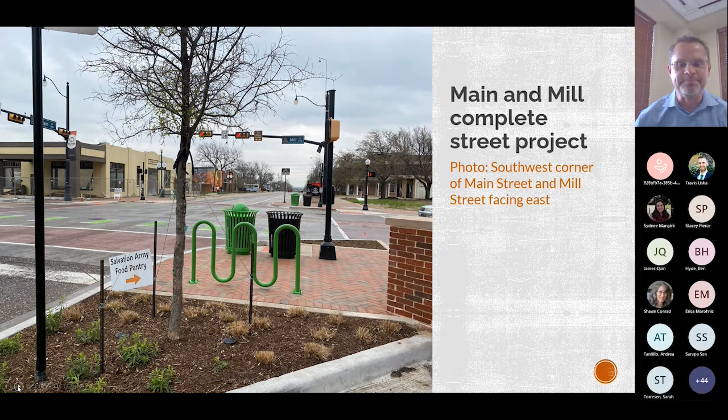This is along Mill Street. Now, Mill Street was formerly US Highway 377 before I-35E was built, and it was a 4-lane undivided arterial street. Because it was so wide, it carried traffic at very high speeds, which made it dangerous for pedestrians.

So with this project, we put the street on a road diet, and now it's a 2-lane street with a continuous left turn lane. The outer lanes were converted into bike lanes, and a combination of parallel parking and reverse angle parking, along with the street trees, which will be a huge benefit as they mature and provide shade on the sidewalks. It'll make it bearable to walk around in the summertime.

This is another view looking north on Mill Street. This is a section that has the reverse angle parking.

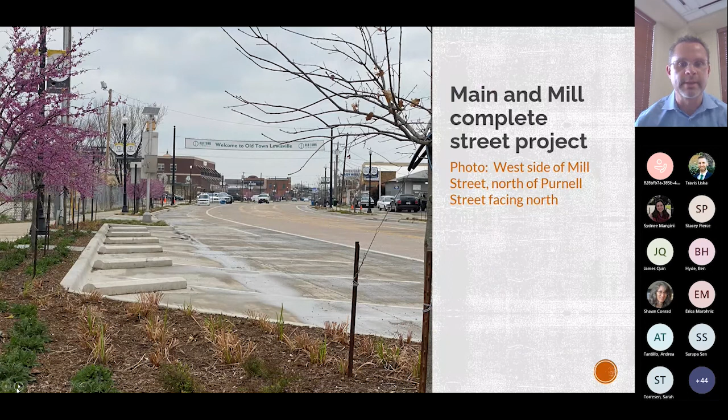This is at the intersection of Purnell and Mill Street, kind of our southern entry into our Old Town area. This is one of the bioswales that was installed as part of the landscaping with the project. So multiple purposes were kind of built into the project, along with multiple benefits.

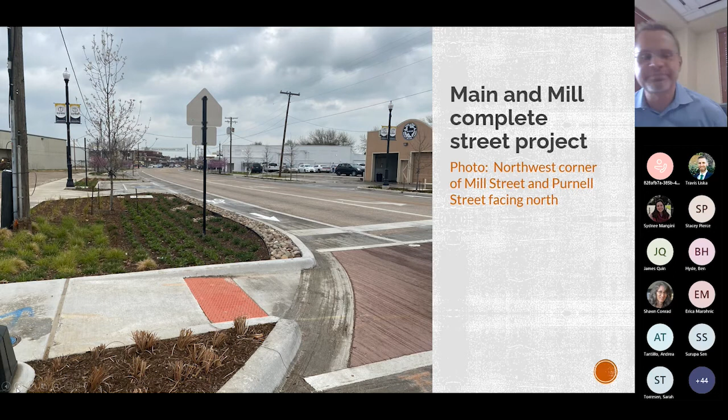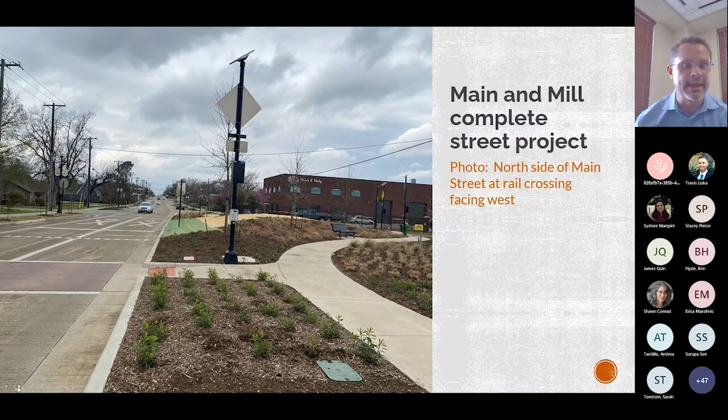Another shot of the eastern end of Main Street, right near the Old Town Station. This was a kind of a triangular island. This is where our couplet begins, and where traffic is diverted onto 2 one-way streets. This was just a huge, flat, concrete median, and that whole thing was ripped out, and landscaping was put in, and pedestrian amenities. Again, it just really changed the whole character of the entire area.

Then this is on Main Street, closer into our historic core. This is one of the art benches that our Arts Council funded in conjunction with the Complete Street project.

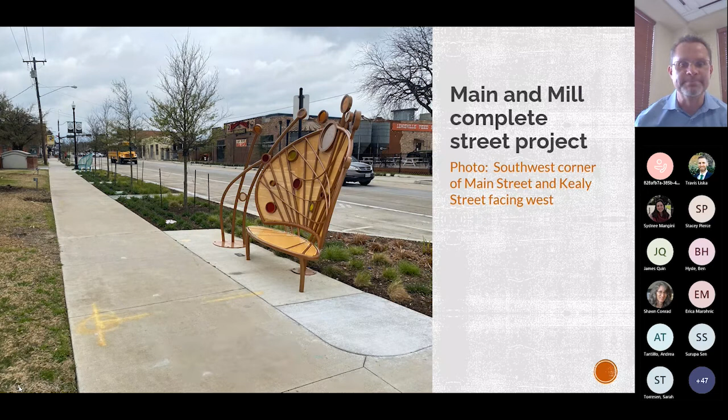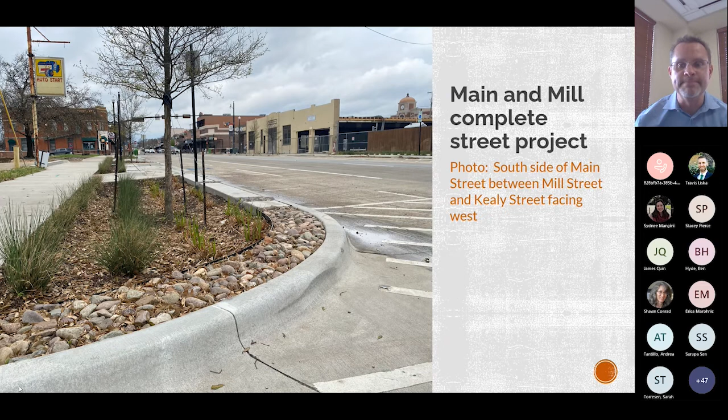This is about mid-block on Main Street between Mill and Kealy. Again, it shows one of the bioswales that was incorporated into the design along with the street trees. And I believe that concludes the Main and Mill project.

Our staff is currently working with the consultant on the design of another complete street, East College Street, which is kind of the northern boundary of our Old Town district. It'll be pretty much the same elements: putting a street on a diet, narrowing the lanes, adding in parallel parking and bike lanes, and wide sidewalks with trees, lighting, and street furniture.

This is just kind of the schematic. The current status of this project, we're about at 65% on the design. Construction should start next year.

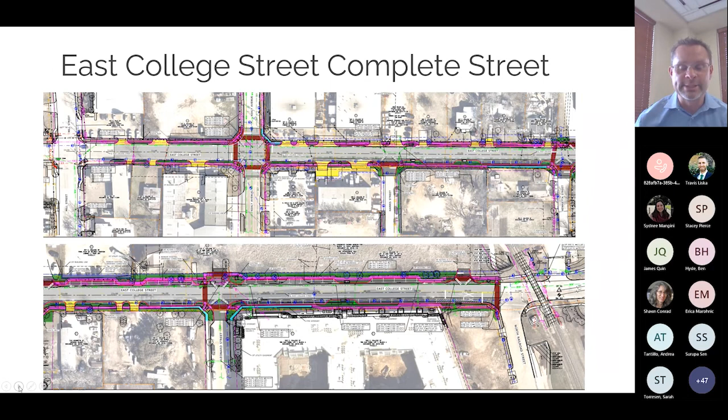It's amazing how infrastructure improvements like this have completely transformed our Old Town area, making it even more walkable. Just having Main Street done has given us a brand new route from our historic core to the station. Before that project was built, we had old broken sidewalk sections, some areas with no sidewalks at all, and very little shade. It was not a pleasant walk from the station to Old Town, but now it is, and it's getting a lot of use.

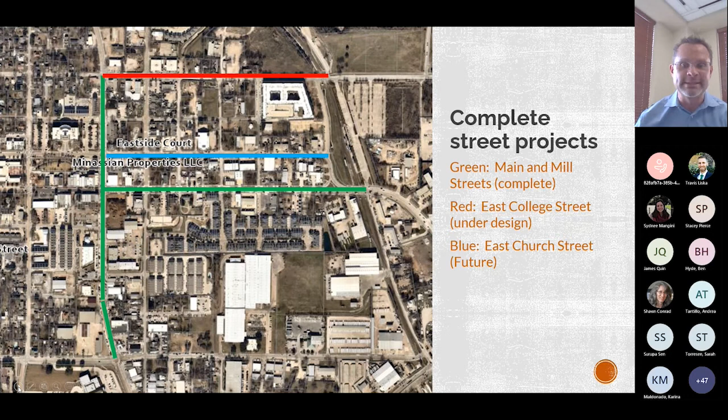Now I'm going to cover some of the exciting developments that have been occurring over the past couple of years. The very first of our large-scale projects is Old Town, just west of the platform of our Old Town station. It's a 4-story, 286-unit urban residential project, and it's what everyone calls a wrap, where the units are wrapped around a garage. It also has two interior courtyards, one with a pool and the other with outdoor amenities. Construction began in November of '19 and was completed in summer of '21, and it's currently 96% leased.

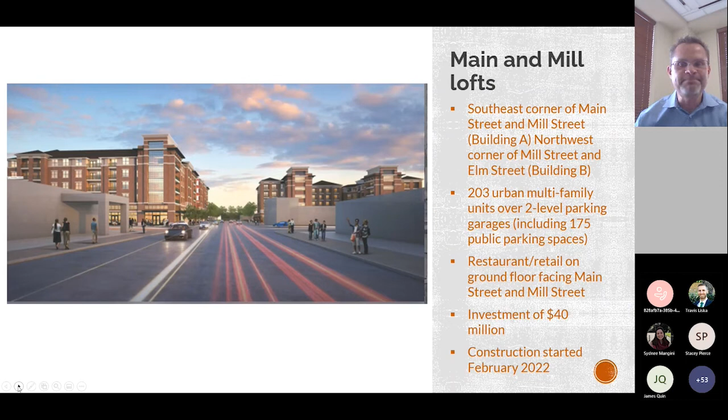Number three, we have the Mill Old Town project, at our southern gateway down at the northwest corner of Purnell. Purnell is the southern boundary of our Old Town Design District, and Mill Street is our primary gateway from the south. This site was previously a former REW Materials business, a drywall wholesale distributor - kind of like a lumberyard. I think historically it had been a lumberyard, and that's where the mill name was incorporated into the name of the redevelopment.

One of the really scary things about the former business was a very high volume of 18-wheelers coming in and out of the site early in the morning, and there's an elementary school about a block away. So there were small children walking to school dodging these 18-wheelers, and we knew we had to address that immediately. We worked very hard to relocate REW to another location in the city, and they moved about 2 years ago.

J Street will be building a 4-story building with 213 urban multifamily units. Most of the amenities will be here on this corner. They wanted to honor the site, which was a former lumber mill, and incorporated some design elements to reflect that history. There will be a pocket park at the end with entertainment activities programmed as part of the development. It's about a $30 million project, and construction will be starting next month.

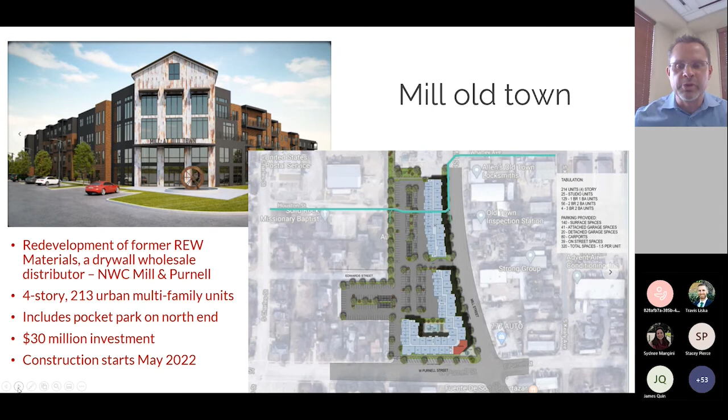This is our fourth residential project, called Old Town Station. It's just northwest of the Old Town Rail Station and immediately north of the ARA project. This will be the largest of the 4 projects, and it'll be on the north side of East College, built in at the same time as the complete street, which we're very excited about. It'll consist of 3 buildings, 4 and 5 stories tall, with 420 urban multifamily units, about a $77 million investment.

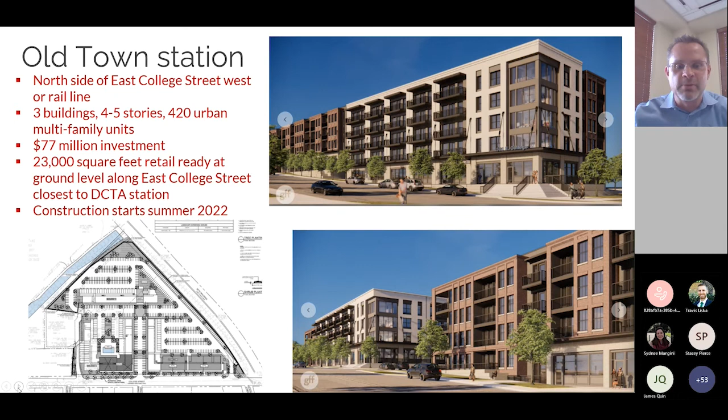One unique feature, shown in the upper photograph, is the ground floor will have 23,000 square feet of retail-ready flex space, built to commercial standards. It'll initially be leased out as living units, but as the market matures and demand for retail and commercial comes into being, they'll start converting that ground floor area, which is in view of the platform of the Old Town Station. Construction on this project starts in just a couple more months, so we're really excited about that.

With those 4 previous projects all together, we got about 1,100 residential units, and that's not even including about 100 townhome units that have been under construction over the last couple of years. So you're looking at about 1,200 new units. That's really going to be a game changer, getting those heads on beds, adding to the walkable atmosphere that we've been concentrating on in Old Town Lewisville.

This project, Deck on Main, is one of our larger commercial projects moving forward. It just started construction. It'll be a 3-story building. The first floor will have restaurant space, the second floor will have office uses, and the third floor will be an event space with a covered deck at the rear, overlooking Wayne Ferguson Plaza, our urban park, which is really the centerpiece of our Old Town. This is about an $8 million project.

This was the site of an old bank building, which was a much smaller building. It had been remodeled back in, I believe, the 70s. It wasn't very flattering architecture and didn't really match the architecture of the rest of our historic Main Street. This will really fill in that block and complete the void that was there.

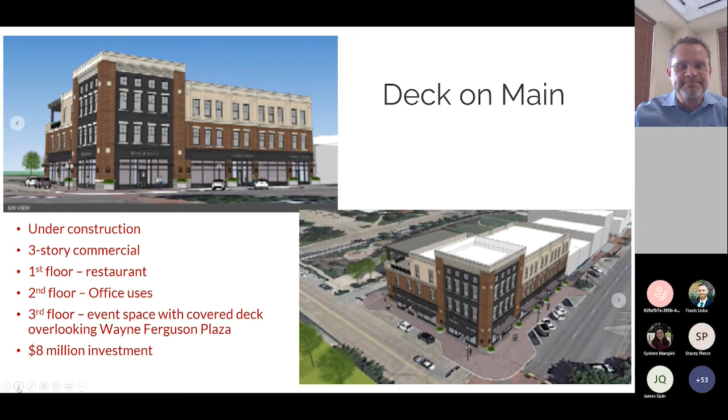This is my last slide. We've been working on an update to our Old Town TOD master plan. This will be our 3rd update. The original master plan was adopted in 2010 and updated in 2017. The previous plans focused mostly on the core of Old Town and the 5 blocks that separate the station from the historic core. With this update, we've really expanded the overall area of study.

We added that whole eastern side, east of the rail. You can see the rail line going north and south through the middle. We also included more of the adjacent industrial areas to the southeast, on the east side of the tracks. We have some incredible opportunities for additional TOD development, and this plan will formulate a strategy on how we get there.

Another very important component is we've added an infrastructure study. We have an independent civil engineering firm looking at all of our water lines, sewer lines, streets, and drainage facilities across this entire area, which will help us pinpoint which areas we need to invest in first, to upgrade the infrastructure so it can facilitate more rapid redevelopment. We learned with the Main and Mill project and the Complete Street that when you build it, they will come. Having that infrastructure in place is usually a big draw for investors and developers.

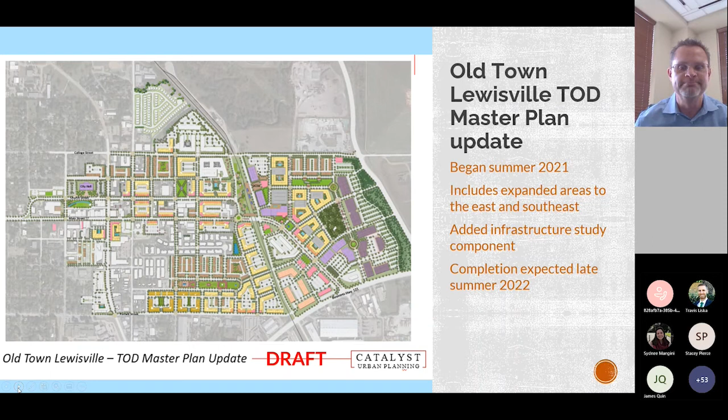That concludes my presentation, and I'll be glad to answer questions a little bit later on during our meeting.

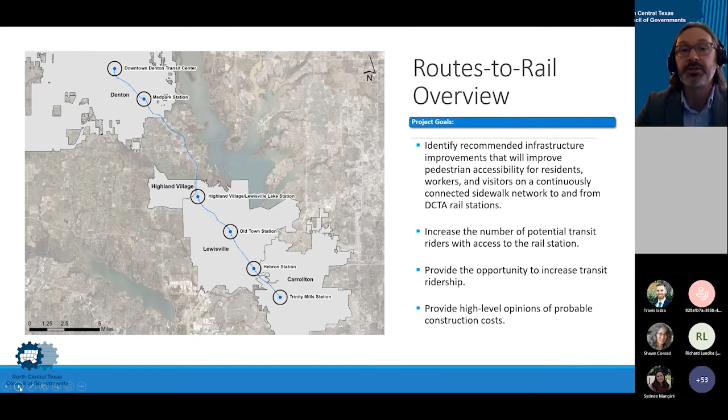As well as part of this project, we developed high-level opinions of probable construction costs. That way, these agencies will have the preliminary information they need if and when they seek additional funding.

So what infrastructure did we actually look at within the half-mile radius surrounding each rail station? The answer is that we looked at both the existing and the non-existing sidewalk network, including the sidewalks themselves, but also crosswalks, driveways, trails, and unmarked crosswalks. This sidewalk network of both existing and missing segments served as the base for our analysis. After identifying the missing sidewalks around the rail stations, we then went through a prioritization process, which I'll provide further information on.

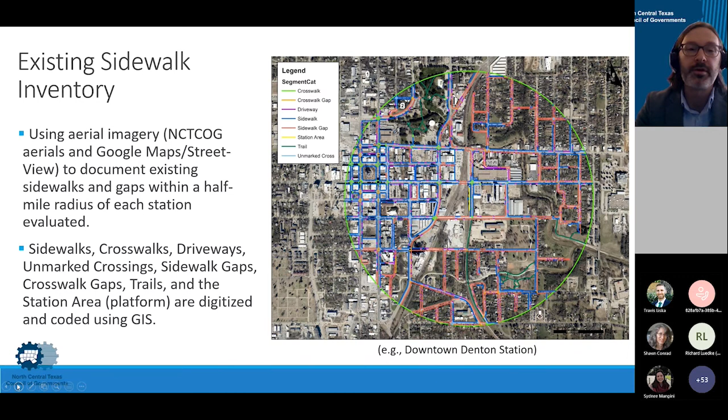So land use, I know this is part of the land use committee task force. Land use played a significant factor in our evaluation, specifically parcel data, primarily from Denton County, but also Dallas County appraisal districts. The methodology for this analysis was originally developed from a Federal Transit Administration TOD planning study that Travis was very involved in for the DART red and blue lines that was completed in 2020. From that study, density was estimated at the parcel level, and it represents the maximum number of people who may be at a property at any given time, based on both the land use category and the reported size.

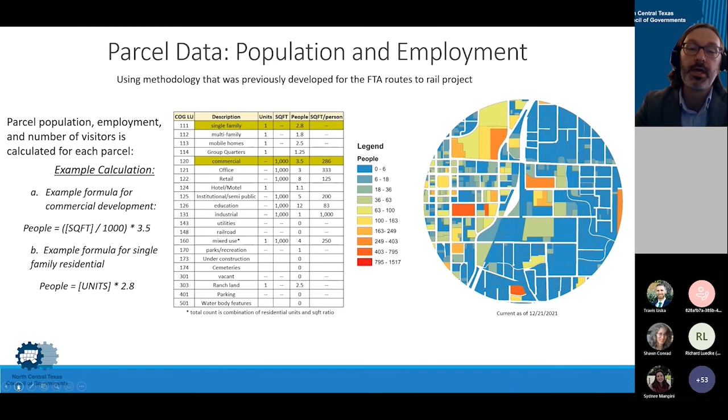For example, for every 1,000 square feet of reported area for a commercial property, we estimated 3.5 people. The map here on the right is a heat map identifying parcels around the downtown Denton Transit Center that are estimated to have the largest densities.

When evaluating the missing sidewalk gaps around stations, the largest factor was the density estimate, which represents the potential new transit riders that would be connected to the rail station. But we also awarded points to missing sidewalks that were closer to the station, so density and distance were the primary factors. We also considered 3 other categories. Points were awarded to missing sidewalks that connected to major destinations such as hospitals, schools, and entertainment venues, as well as sidewalks that would address areas with a history of pedestrian crashes and posted high speed limits.

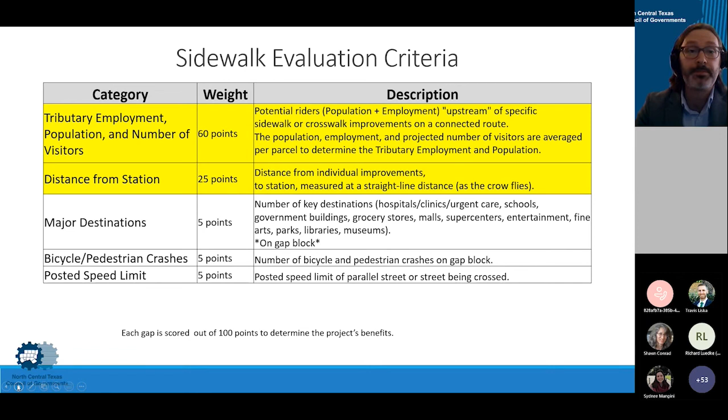After the whole scoring process, we prioritized sidewalk gaps on a high, medium, and low scale. With this map here, you can see the high priority sidewalks in red, the medium in orange, and the low in yellow, overlaid with the density parcel data that I previously discussed. Here also with the map, the existing sidewalks are in blue.

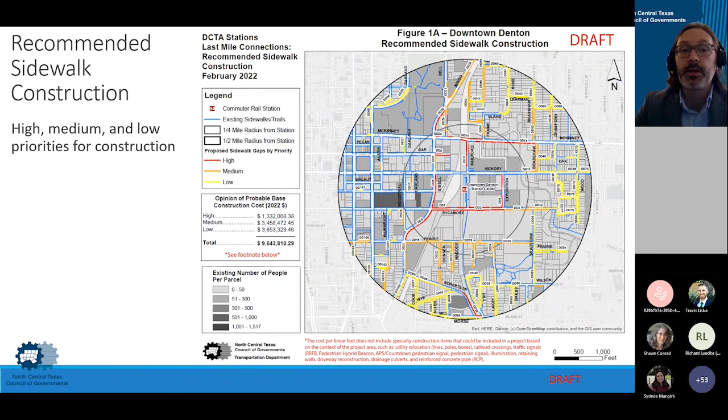For a quick visualization, I have a few slides to demonstrate how prioritized sidewalks will increase connectivity, using the example of the downtown Denton Transit Center. On this map, existing sidewalks are shown in blue, with individual parcels identified in gray. As you can see, many parcels are not connected to the rail station due to gaps in the sidewalk network.

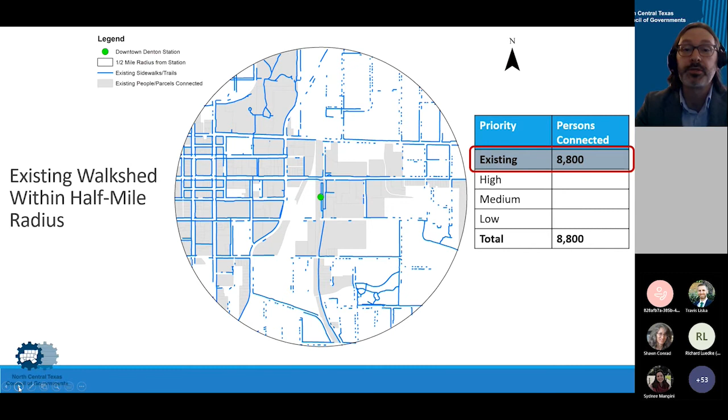Based on our analysis, an estimated 8,800 people are currently connected to the rail station itself.

However, if the high priority sidewalk gaps are constructed, an additional 1,100 people are estimated to become connected and able to access the rail station. On this map, the dark gray parcels indicate the new parcels that would be connected if those sidewalk gaps are constructed.

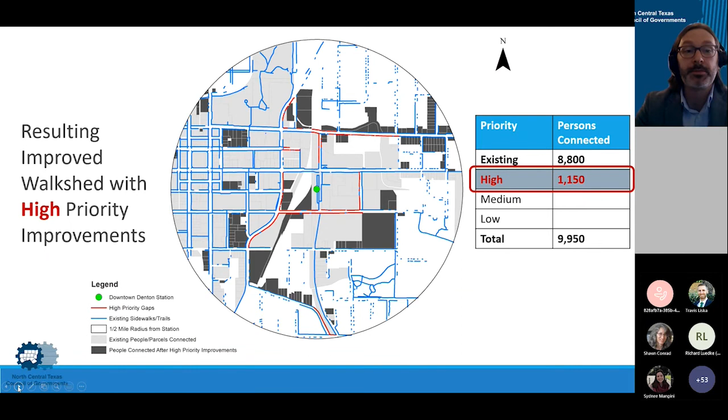Next, the medium priority sidewalks show an additional 2,300 people estimated to become connected. You can start to see the full half-mile radius area becoming more connected, with many parcels further away from the rail station able to access the station via the sidewalk network.

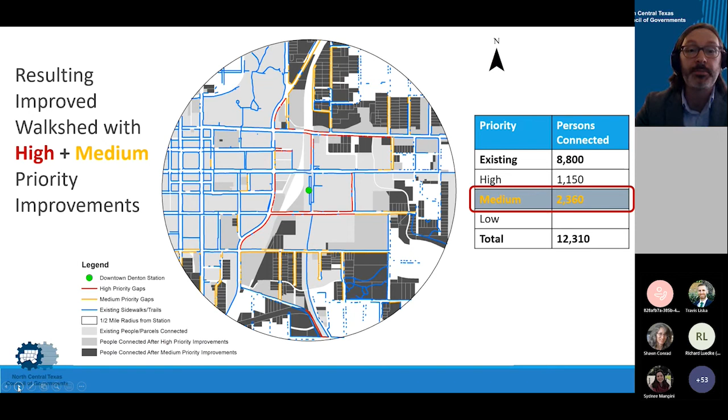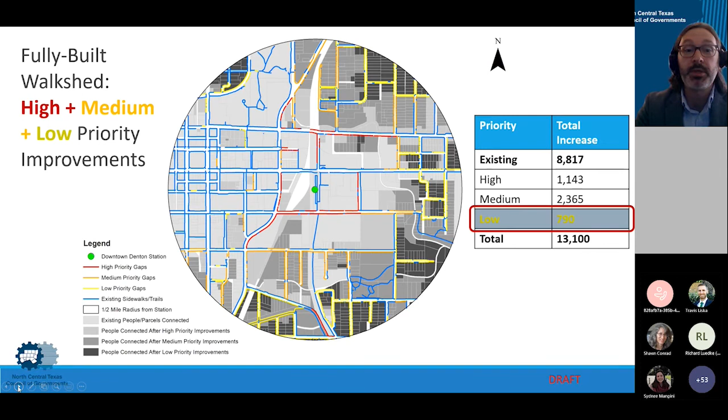I mentioned earlier that we developed a high-level opinion of probable construction costs for the missing sidewalk gaps for all six stations. The base cost doesn't account for factors that may or may not be encountered, such as utilities or lighting. Therefore, we encourage every agency to look at the sidewalk gaps in more detail to develop a more accurate cost estimate.

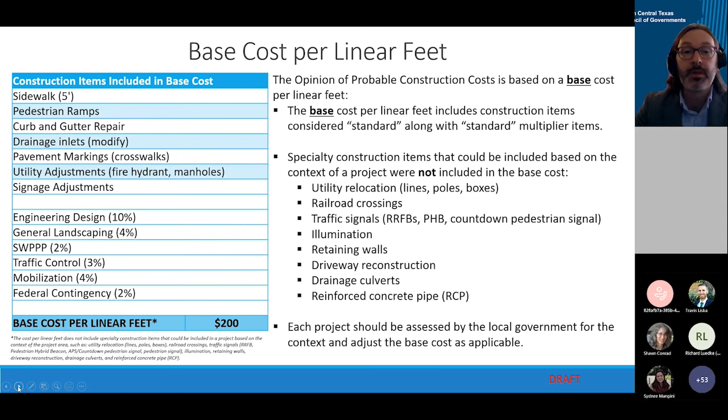And that is my presentation. If there are any questions later on, I'll be happy to answer them. Back to you, Travis.

Thanks, Daniel. A lot of good slides there illustrating the process. Really appreciate you going through those details. We've closed up our local updates section, and we just have a few questions in the chat to address here. Richard, if you're still there, we've got a couple for you. I'm going to try and help us get through these quickly.

First, I see Ben has asked about additional grants. I know NCTCOG will have an upcoming active transportation alternatives set aside, a funding call for bike ped projects, so that addresses that question.

Both Ben and Lashandra have asked about the retail coming into Old Town. Richard, what kind of retail do you have coming in, and is it on the ground floor of that multifamily, or is it restaurant, office? Can you tell us a little bit about that side of things?

Yeah, we're seeing a little bit of both. Our existing retail and commercial on the ground floor of our existing buildings are doing very well. It seems like excitement is building as more improvements are made and new projects come online, and more people want to jump on that train and be part of it. We're constantly meeting with new businesses that want to enter Old Town. I believe the Main and Mill project already got commitments for almost all the ground floor spaces, and they just started construction, so that's really good news.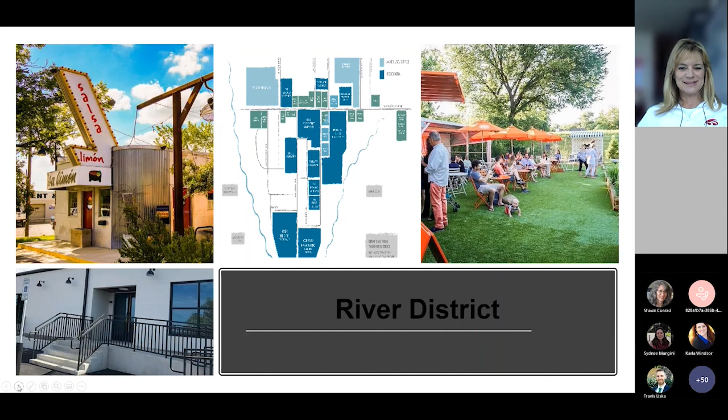This would be River Walk Homes, which are east of downtown, again in the neighborhood close to Topgolf. But these are townhomes. Our friends at Village Homes are really experimenting with a lot of product along the river. This area is just now starting, so a lot of different options are still in the sketch phase, not yet developed. But what you're seeing, I believe, is what they call the coastal design of this particular area. And it'll be exciting to see what that connects in a new area of our river network.

Waterside is located off of Bryant Irvin Road on the west side of town. Like many of the ones we've talked about, it features a direct connection right behind it to the Trinity Trails network, just down from Clear Fork and the trailhead, and features a great set of service options. So you're seeing here Whole Foods, restaurants, The Rim and Piatello, a lot of different residential product, all mostly for lease, although there are a couple of new for-purchase options, and then several other restaurants in addition to those, plus REI and great access across Chisholm Trail Parkway, again to Clear Fork and the trailhead.

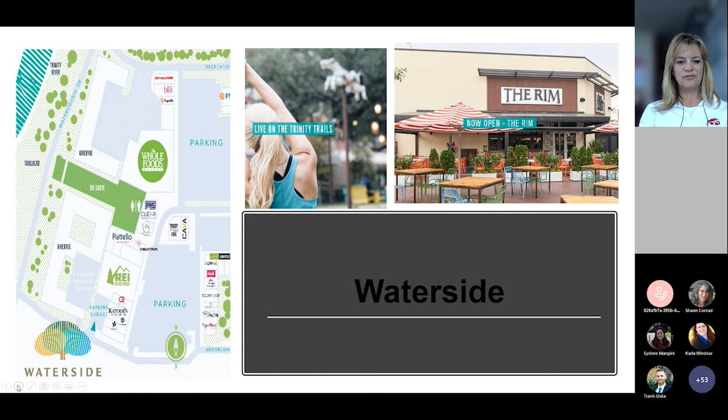And then finally, my last example is West Bend, which is across from University Park, and on the area of the trail that again is so mixed use. This though is much more commercial, so not a residential product here proper, but really close to our zoo and our Colonial golf tournament when it happens at the Colonial Country Club, and a lot of other residential and retail options, a lot of neighborhood access through West Bend.

Each of these areas is incredibly popular. They're in various stages of development, especially some of the residential ones, but we're so fortunate to have a diversity of product that is, I think, a benefit not only for our local residents, but our tourists, and an amenity that gives us a competitive advantage as we seek to improve our workforce and as we grow quite rapidly in Fort Worth. I might tell you there is a new exhibit at the Fort Worth Museum of Science and History.

It is the Biennale exhibit, which was on display in Venice back in November of 2021. It is all about watershed urbanism. So I work on the river and the trails, but it's a similar idea in that we want our environments to be symbiotic and complementary, and we want people to be able to utilize them in a variety of ways, both functionally for transportation, recreationally, and also to be able to use some form of transportation, bike or ped, maybe to even do some of the things that are errands and service-oriented trips.

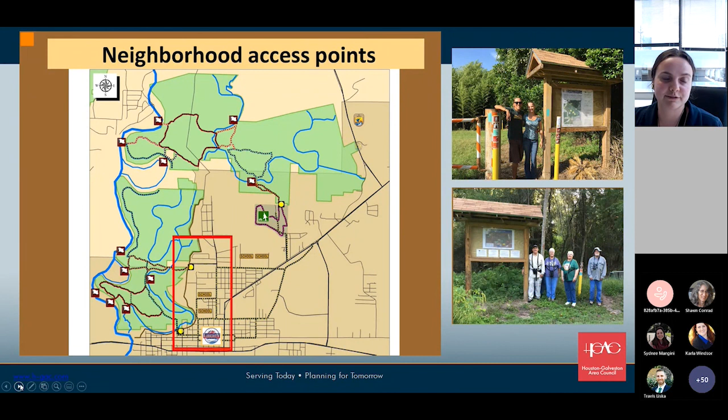This next scenario is in the City of Houston, in Harris County, and this was deemed the high investment example.

The Buffalo Bayou Partnership, a nonprofit, owns this 22-acre vacant site at the Lockwood Water Treatment Plant, and has owned it since 2012. They've been making a lot of progress on their multi-phase plan to build trails and amenities along Buffalo Bayou, which runs right through downtown Houston.

It's set to include a visitor center, event space, a cafe, and a dock where people can rent kayaks. Those are all high investment amenities, but the trails along Buffalo Bayou are also very well integrated into the city of Houston. At some of the already completed portions, there are food trucks along the trail, basic things like water fountains, and stairs and ramps that take you directly up into city streets. It's been a really successful project here in Houston.

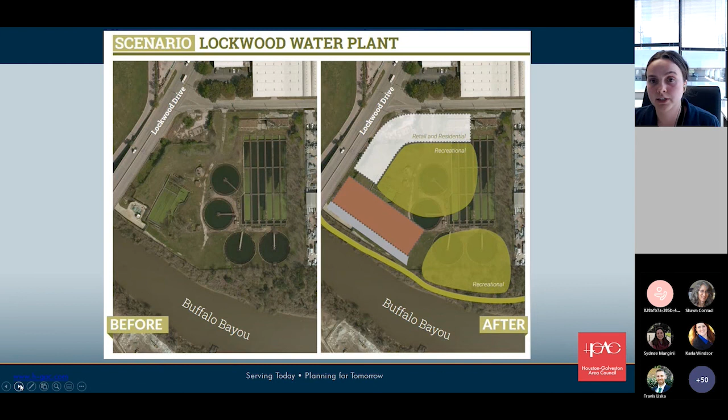So if you'll indulge me, I'm going to depart from the primer a little bit to spend my last few minutes talking about a project that is relatively new. The primer was published in 2018, and this is a project that is deploying a lot of the strategies from the primer.

A few months ago, five entities - the cities of Fulshear, Weston Lakes, Wallis, Eagle Lake, and Austin County - officially formed a local government corporation with the purpose to build a shared use trail along a former rail corridor, all west of Houston. If you're looking on the map, Houston is all the way to the east, and the trail moves westward.

One of the key elements of the vision that this group of cities and one county share is the idea of trail towns. A trail town is defined as a community that supports trail users with services, promotes the trail to its citizens, and embraces the trail as a resource to be protected and celebrated.

All of these cities have agreed that they plan not only to design, fund, and build a trail, but they want to work with city representatives, existing businesses, and developers to entice people off the trail and into their rural and small towns along the route. Since biking is already a popular weekend activity on the country roads west of Houston, they're thinking that by orienting amenities to be biker-friendly in the trail-adjacent towns, it'll be a win-win - more visitors to the small towns, and the bikers get a safer place to bike than just on the shoulder of the road. So we're excited to see how this project progresses in the next couple years.

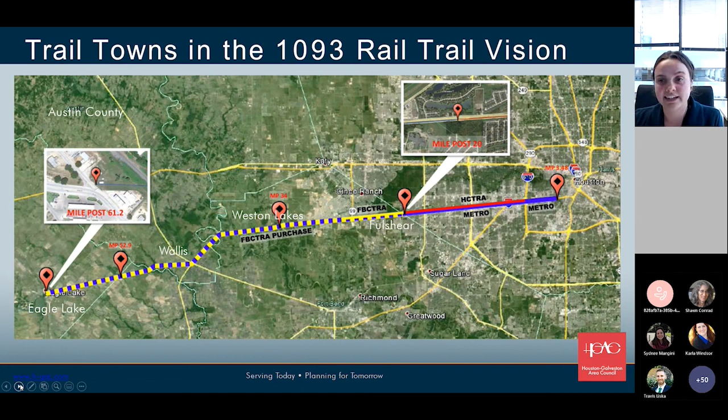I think that's all that I have. I put the website again, and I believe someone put it in the chat as well. So thank you, and thank you all very much for your time.

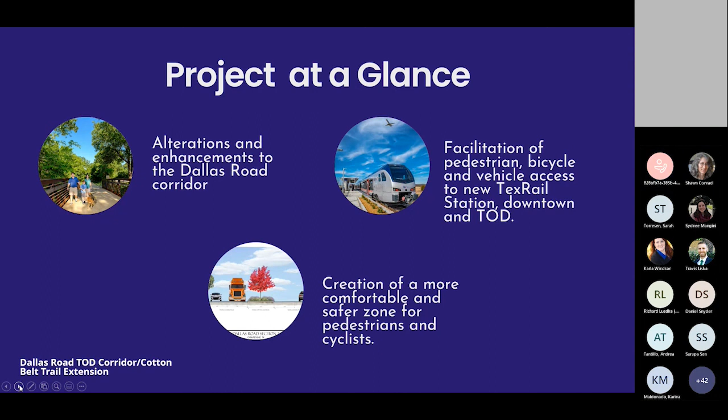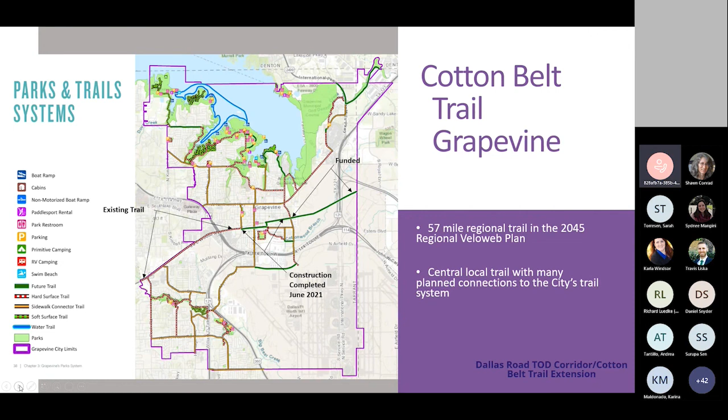This slide shows the Cotton Belt Trail through Grapevine. The existing trail was already constructed from about Pool Road on the west side of town all the way up to Ball Street. This segment included Ball Street to Dooley, completed in June of 2021. There is a missing segment that would complete that portion of the trail system through the rest of Grapevine and into Coppell, which has been funded and is approximately at 30% design.

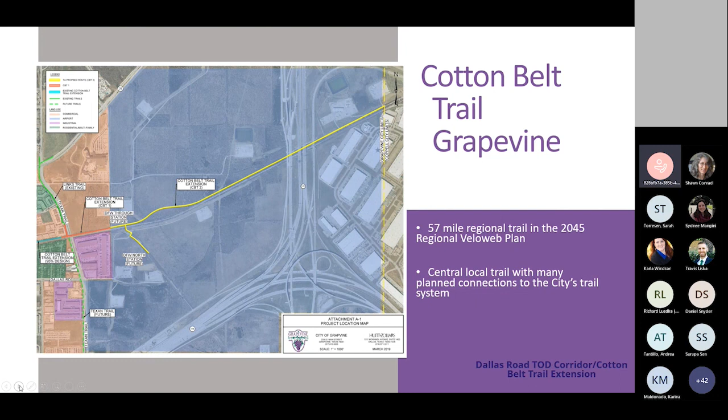This map indicates a more detailed aerial look at what was constructed. The extension project incorporated the alterations and enhancements to Dallas Road Corridor, trying to connect to the city's other investments and work with the TexRail station, our historic downtown area, and our future transit-oriented developments.

At the northeast corner of South Main Street and Dallas Road, the city had a fairly large investment in a public-private partnership with TexRail, Coury Hospitality, and the Harvest Hall developers to provide a 552-space public parking garage, Harvest Hall, which is a food hall, the Vin Hotel, and then the train station, which is connected to Harvest Hall.

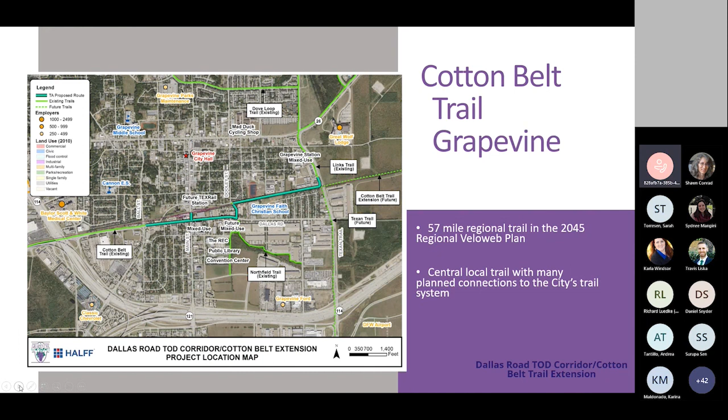The main aspects of this project included complete street components, and as mentioned before, we accommodated 1.5 miles of the Cotton Belt Trail, which was all off-street. It's part of an important 57-mile regional trail, part of the 2045 regional VeloWeb plan, as well as a central local trail with many planned connections to the city's existing trail system, also shown in the city's 2016 Grapevine Master Trails map.

Grapevine was awarded about $5 million in funding because the project scored well in criteria including improved regional network connectivity through additional shared use trails and sidewalks, improvements to safety for pedestrians and cyclists, reduced congestion through alternative trail options, safe crossings of major obstacles, and improved access to disadvantaged populations through more trail and sidewalk connections. It also received quite a bit of community support, including from adjacent businesses along the Dallas Road corridor through letters of support, public meetings, and workshops.

In this concept plan, you can see the connection to the existing trail, future sidewalk connections, enhancements at South Main Street along Dallas Road, and multiple other connections.

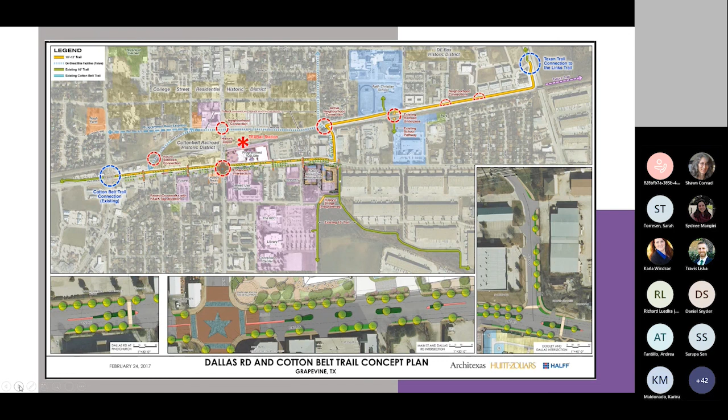The main thing we did with Dallas Road is a road diet, as Mr. Luedke mentioned during his update on the Old Town in Lewisville projects. Dallas Road was a segment of a thoroughfare about five lanes wide with a continuous left turn lane. What they did was bring each of those travel lanes down to 11 feet.

They included a raised landscape median to provide a divider line, separated the multi-use path or trail away from the roadway, provided a barrier with landscaping and street trees between the new roadway and curb line and the proposed multi-use path, and provided pedestrian scale lighting.

One of the main things both the Public Works Department and Parks and Recreation Department staff did was speak with each of the property owners and tenants, going door to door to get buy-in. They sought to reduce the number of curb cuts, which led to the success of this project.

There weren't as many curb cuts because a lot of the uses along this corridor were multifamily, or larger end users with larger parcels, so there weren't as many connections onto this segment of Dallas Road. But ultimately, for specific design components, they overall reduced the number of driveways.

They were able to tighten up curb radii and provided some armored radii through stamped concrete paving, which would alert drivers, walkers, and cyclists that there was something there they needed to be aware of. They reduced vehicle turning movements by putting in that raised landscape median, so there were no longer free left turns.

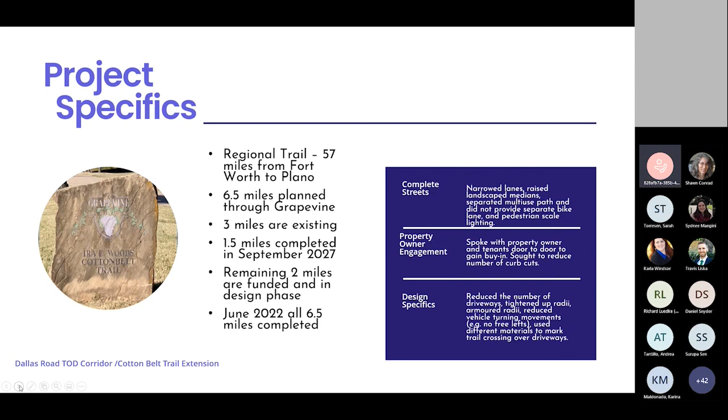There were some directed left turns, and they used different materials to mark trail crossings over both driveways and for those connections across Dallas Road. Next slide, please.

These project specifics indicate some of the improvements as they were undergoing construction. The one on the far left shows some of the concrete and paver markings that were provided at South Main and Dallas Road. The one to the right shows the armored radii that were put in to allow for the longevity of these new driveway aprons that were constructed.

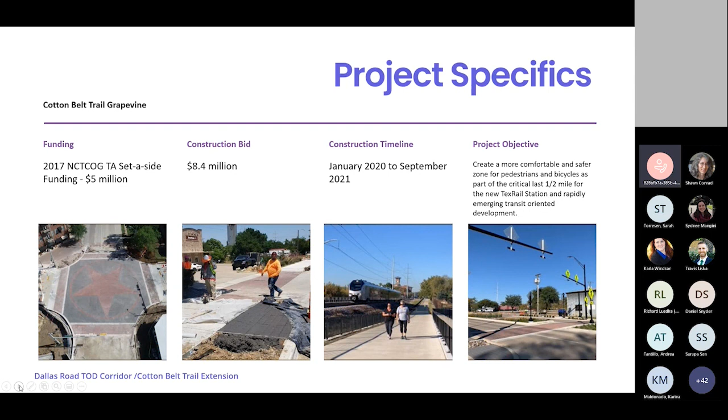In the middle, you can see the completed trail adjacent to the existing Tex Rail line. On the far right is one of the raised crossings with pedestrian scale lighting, along with signage and markings that make it safer and a refuge for both cyclists and pedestrians.

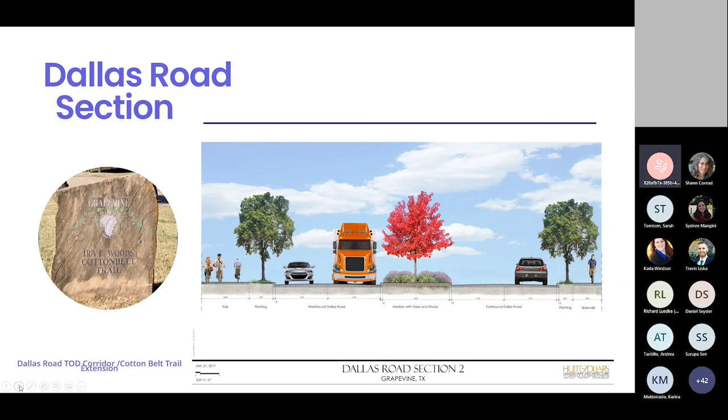This was the roadway section that was approved and has been implemented and constructed. You can see that the multi-use path is well off the roadway, with a small planting distance with street trees and ground cover in order to distinguish it from the travel lanes of the roadway.

These are examples of driveway treatments and some of the driveways that were closed.

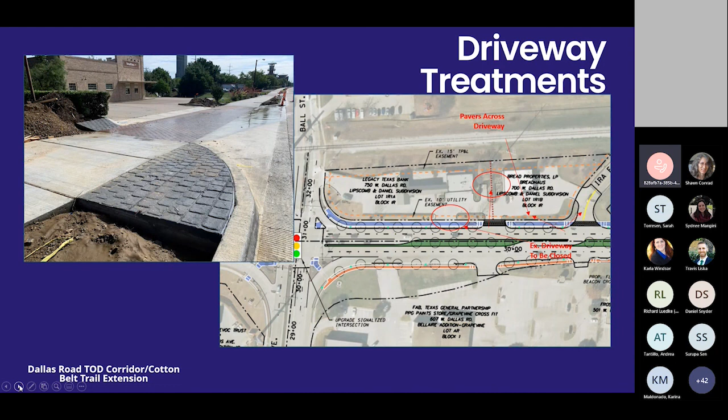This is heading eastward from Ball Street, so you can also see the refuge islands and restricted vehicular movements that were placed. Previously, there were free right and left turns from Ira E. Woods connecting northward, and those were restricted to have hooded lefts. There was some concern about that from property owners and business owners at the time, but since implementation and completion of construction, there haven't been as many complaints.

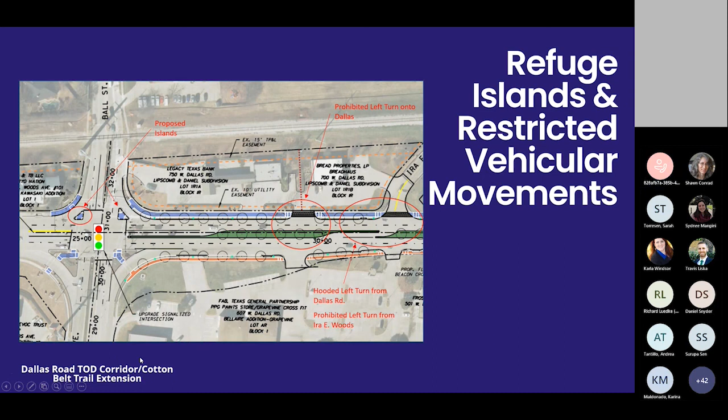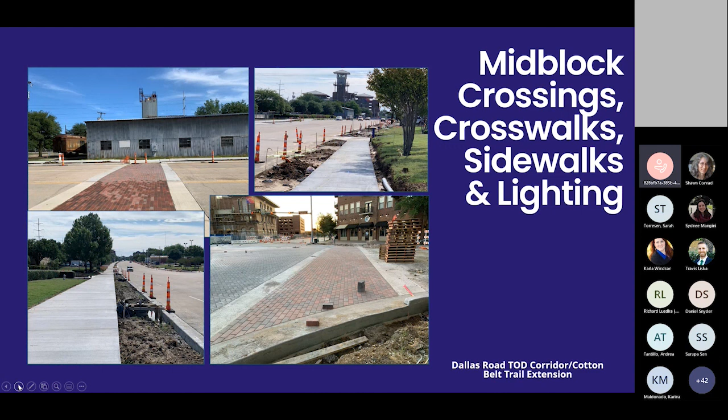Overall, what was completed with construction were 6-foot wide sidewalks, approximately 125 shade trees, and pedestrian lighting added along this corridor from Ball Street to Dooley, with benches and trash receptacles. I believe that would fall within those low impact investments that Ms. Toresen was mentioning earlier in her presentation. There are landscaped centered medians approximately 5 feet wide with buffers from back of curb, narrower 11-foot wide travel lanes, reduced number of driveways, and tighter radii.

There are 3 major mid-block crossings with the use of pavers. There's also a new signalized intersection with crosswalks and pavers that hadn't previously been there, and 2 enhanced signalized intersections with refuge islands. This makes up that 1.5 miles of completion of the Cotton Belt Trail.

I'm sorry, I'm just not seeing the slide progress.

As mentioned previously, these improvements coincided. They were separate, but working and really dovetailing with overall long-range planning efforts the city was embarking on at the time. In 2019, the city adopted our Transit District Overlay Ordinance, which allowed for additional flexibility and reinvestment in an area that had been primarily heavy commercial to industrial uses along this segment of Dallas Road. While there were some existing single family uses along the eastern side of the corridor,

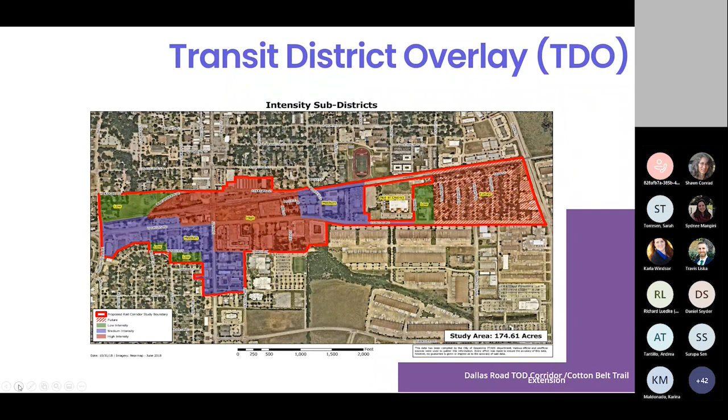this is an area of particular interest for the City Council and for residents. They want to see private investment brought to this area after the city's investment within South Main and the historic township district.

What really spurred this off, predating the Transit District Overlay Ordinance, was the public-private partnership with the city with Coury Hospitality for that parking garage previously mentioned, the hotel, Grapevine Station which is the Tex Rail station, and Harvest Hall, the food hall located at the northeast corner of South Main Street and Dallas Road. This does predate it. The entitlement started in 2016 and construction completed before the Dallas Road and Cotton Belt Trail improvements finished, but they definitely dovetailed recently.

The city made this investment because they wanted to see additional private investment. While that hasn't happened probably at the rate the City Council would like to see, it has definitely spurred additional interest in the area. The council did just approve a brownstone project, more of a townhome project on approximately 1.5 acres just southwest of here, back in March. That would be our first TDO development taking advantage of our TDO tool.

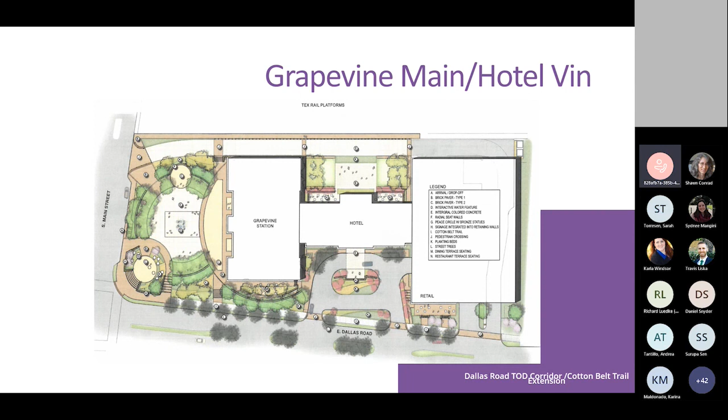This is some imagery of what was constructed and completed showing Grapevine Main, the hotel and the parking structure. Next slide.

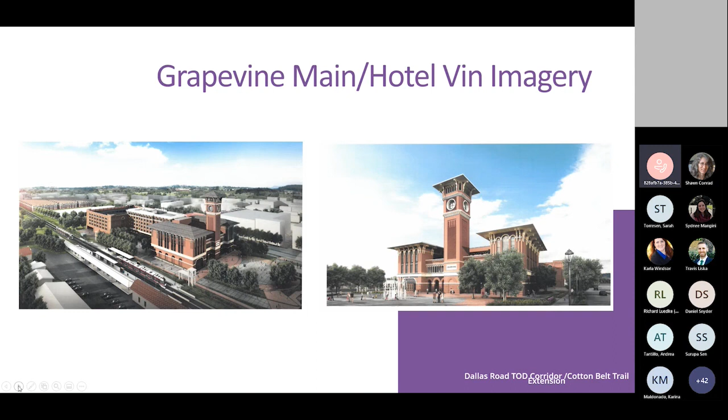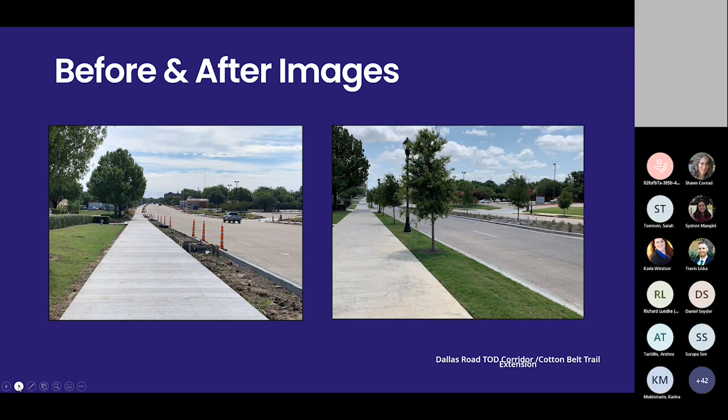Next slide, please. Erica, I think there's a little bit of a delay in the slides being shown on your end. I think so too, I'm so sorry. No, it's not your fault. Just give it a couple of seconds.

Okay, do you see right now? Are you seeing the before and after image? Yes, the right image. South Dooley Street - okay, so you can see where it was the 5 lanes with the continuous left turn lane, and now it's got the signal with the raised median, landscape median. Okay, next slide, please.

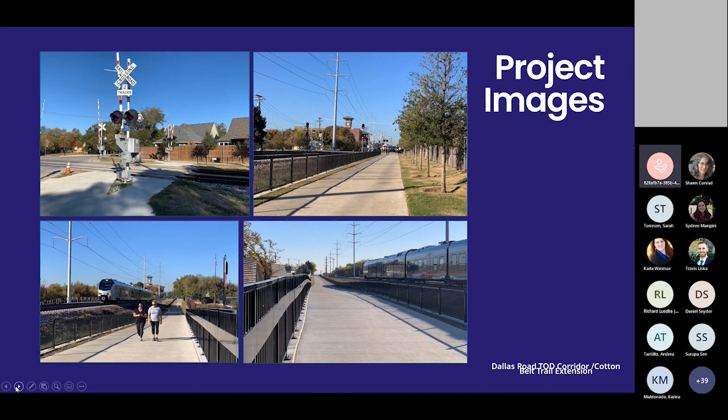More project images. Okay, there we go - there's the trail next to the rail line. Next slide, please.

And then that completes our presentation.

Wonderful, thank you Erica, we really appreciate that update. Really cool stuff going on in Grapevine. I'm excited to check it out, I'm sure others are as well. And thank you, everybody, for your patience with our technical difficulties.

Great, these were all really fabulous presentations. Really appreciate your input and participation, everybody.

I did see Clayton Comstock mentioned that there is an event tomorrow morning where it sounds like Erica is going to be presenting. If you wanted to mention that really quick, Clayton. Or Erica. Sure, it starts at 8:30 and we'll be there. They've rented out a room and I think the coffee's free. Okay, it looks like it's at Redefined Coffee House in Grapevine. It's a Midwest Texas APA Lattes and Leadership event. So if you guys have a link to that, you want to drop in there, that would be wonderful.